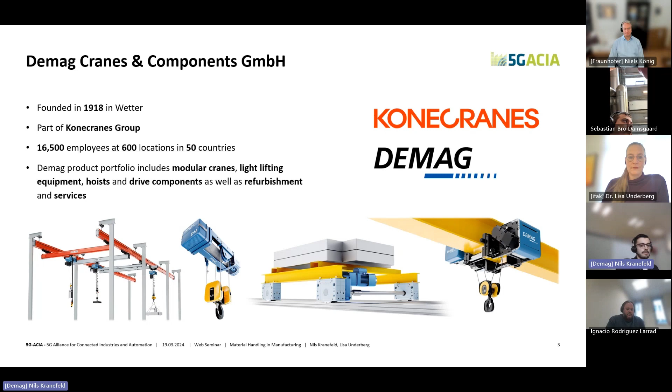I'm working in a research department here, which is called the Research and Business Factory in Germany. We're also located here in Wetter. Currently, we have 9 team members. The department was created in 2018, and we're focusing on the participation in government-funded and non-funded research projects, as well as in business-driven projects. There, we're developing the next generation of cranes and also building different demonstrators and proof of concepts, as well as minimum viable products for our research. And we're also participating in associations and alliances, as here in the 5G-ACIA. Another big part of our work is working with students who are writing their bachelor and master theses at our department. So we're also training new specialists.

Talking about the facilities, here you can have a short view of our research factory. We also have some office space, you can see on the right side of the factory, and there are several material handling equipment cranes, for example, installed. And we also have a 5G standalone network from Nokia, which is currently on release 15.

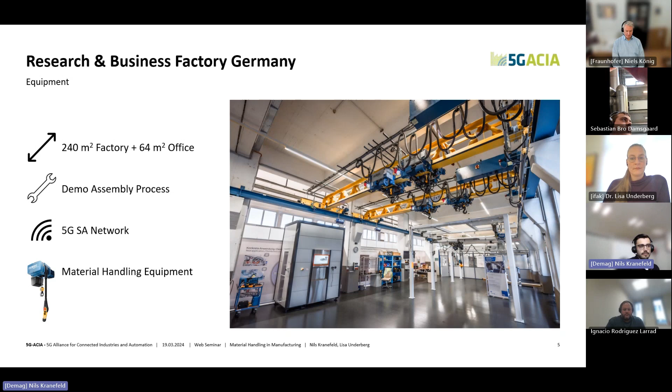In 2021 we started this testbed here at the research factory, and there we want to test the 5G technology in an industrial environment with special regards to our material handling applications and in terms of intralogistics. So here we're evaluating the performance of the 5G network by measuring - that's the first part. And we also demonstrate the use cases we want to use with the 5G network. We do all of this together with our 4 members, so also we're working with Nokia, with Rohde & Schwarz, and ifak.

Our use case we want to evaluate is that we implemented innovative assist functions in our cranes, which are semi-automatic. We will later see a demonstration of them. Therefore we're using different devices like you see on the left image in the building here, and we have an AGV, also a high lift truck, and we're also using the overhead cranes that you can see in the image. These devices and machines are communicating with each other, and they also transfer control commands and safety functions.

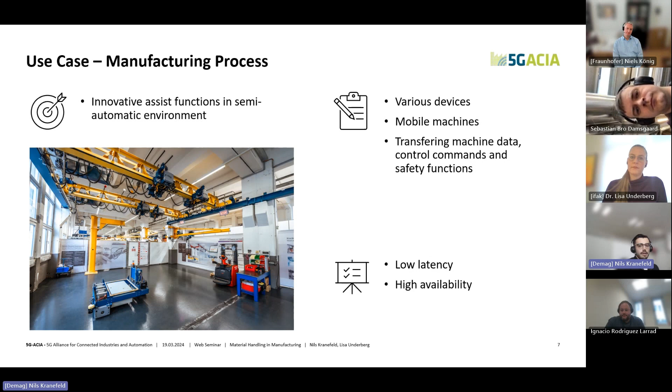The concrete benefit of these assist functions is that the worker is supported in many ways. First of all, it is possible to control the cranes via repetitive routines, and therefore we are reducing non-value adding activities like walking to get the radio control. We also enhance safety, as it is easier for the operator to control the crane while having more option to see the environment.

And now I will show you a quick video where we demonstrate the functions, and please follow along.

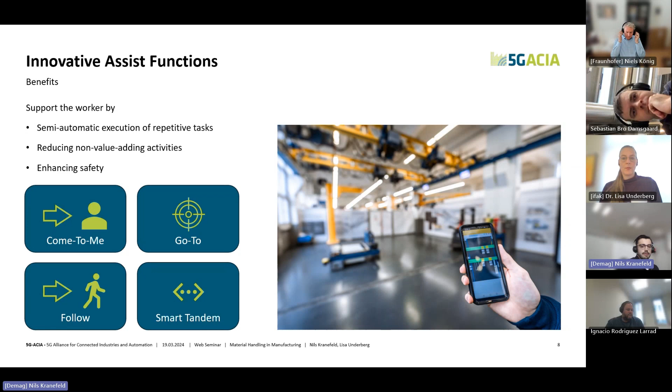Hello and welcome to our research and business factory here in Wetter. Today we want to show you our 5G-ACIA testbed, and we want to demonstrate the use cases and the innovative assist functions that we implemented in our cranes.

The assist functions are controlled via a smartphone app. After opening the app, the operator first needs to authenticate himself by scanning a QR code. When the authentication process is finished, a shop floor screen appears. On this screen, the crane, the AGV, and the operator's position are displayed.

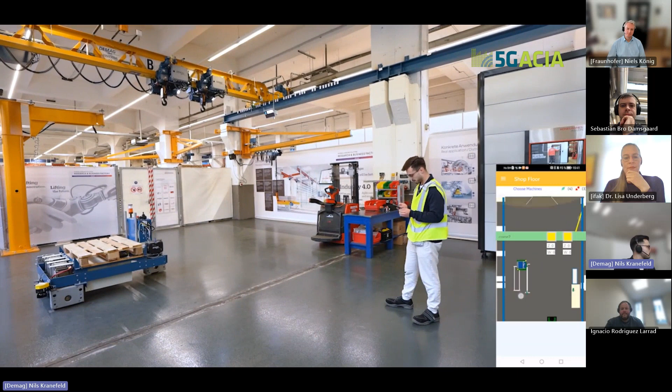To identify the positions, ultra-wide band tags are placed in the vest and on the machines. Before this function can be used, the crane needs to be reserved. To reserve the crane, the operator taps on the desired crane and reserves it via a dedicated path.

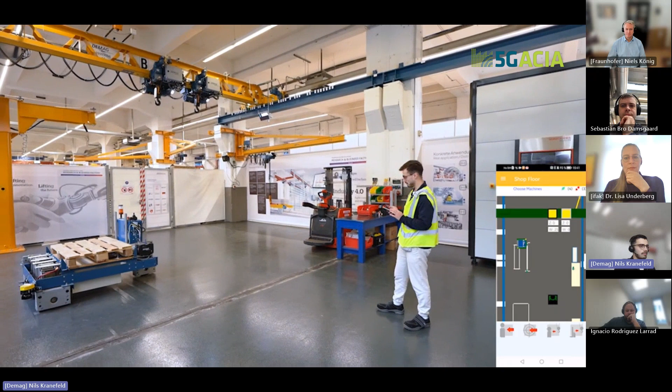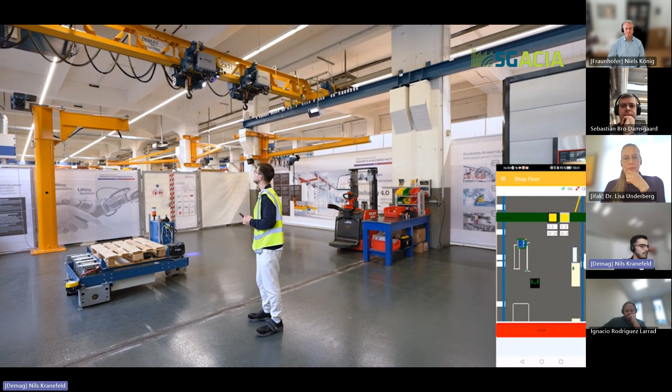When the operator selects the trolley, four buttons appear at the bottom of the screen, used to trigger the different assist functions. By triggering the Come To Me function, the operator tells the crane to move to his position. The blue spotlight indicates that an assist function is in operation, and the crane automatically moves towards the operator without any need of a radio control.

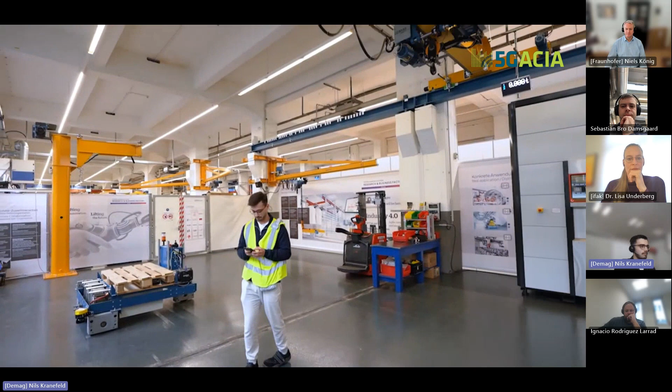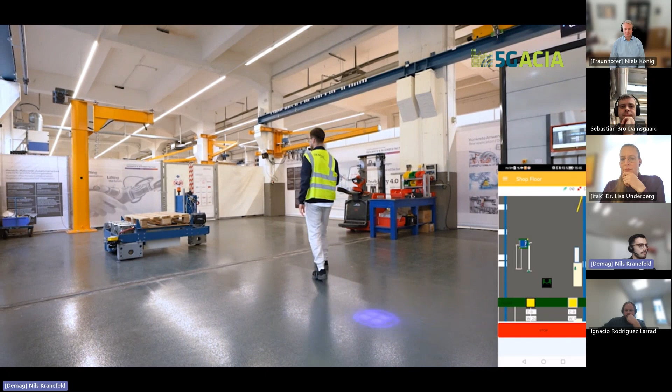Another assist function is the follow function. When active, the selected trolley follows the path of the operator. A slight delay is implemented to prevent sudden movements of the crane and enhance safety. During this process, functional data is periodically exchanged using OPC over our 5G network.

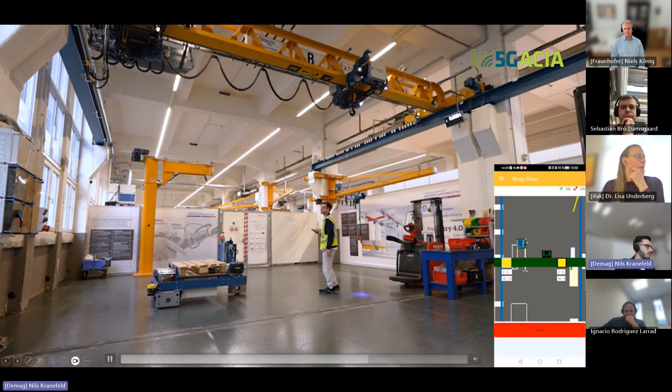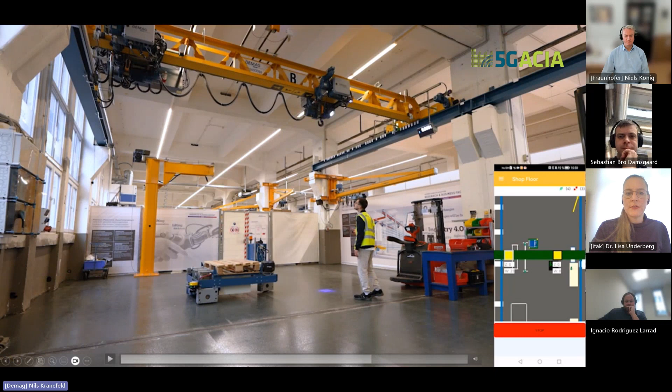A simple function is the follow machine function. When used, the crane follows a machine traveling through the factory. In the show scenario, the crane follows an AGV. The AGV uses a SLAM algorithm for orientation on the shop floor. The positional data is extracted and transferred to the crane via the 5G network.

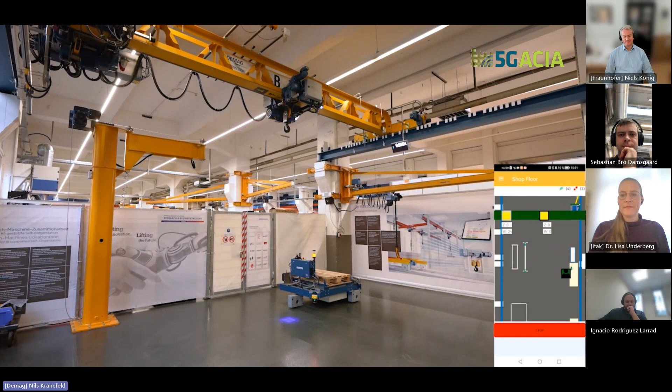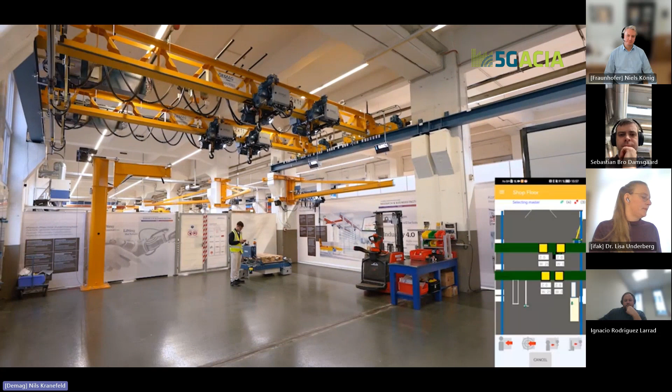It is also possible to use multiple cranes and trolleys together at the same time. When activating this operational mode, the operator selects the master trolley, which specifies the position used during the process.

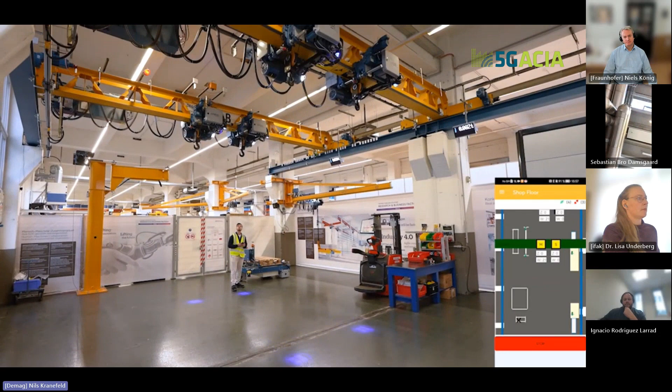If the so-called tandem mode is active, the safety-related CAN data, which needs to be exchanged between the cranes, is also transferred via the 5G network. In this use case, ultra-reliable low latency is needed to ensure functionality and safety.

Okay, yeah. First of all, sorry for the issues with lagging. I hope at the end you still got the idea of our use case. We will also provide the video so you can watch it again afterwards. I'm very sorry for that. I think I had some GPU issues, whatever, having the video on and also my camera.

But basically, I think you got the idea that we have data, safety relevant data, and also communication data that is transferred for the control of our cranes. Now I'm happy to hand over to Lisa, and she will explain how we evaluate the performance of our 5G network regarding our shown use case here.

Thank you very much, Niels. You made a very good summary. Niels presented basically the first part of the testbed, which was to demonstrate the use cases relevant to control the cranes and to have the smart assist functions. The second part was on measuring, and that's where ifak and Rohde & Schwarz come into play, the two partners. I'd like to take you on a quick trip to some example results.

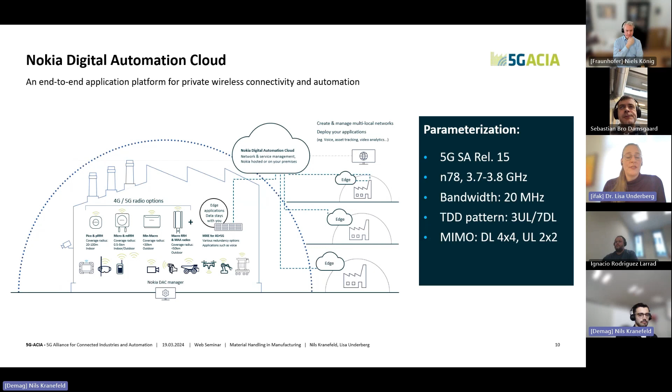First, we conducted not only one standalone measurement campaign, but multiple measurement campaigns. We started out with an LTE implementation that was installed in the research factory and then moved to 5G SA. For today's presentation, we selected 5G SA results, not only of default parameters, but also with adapted parameters, as the default parameters are targeted to balance energy consumption and performance. As you have seen from the use cases, we have specific requirements with respect to reliability and low latency.

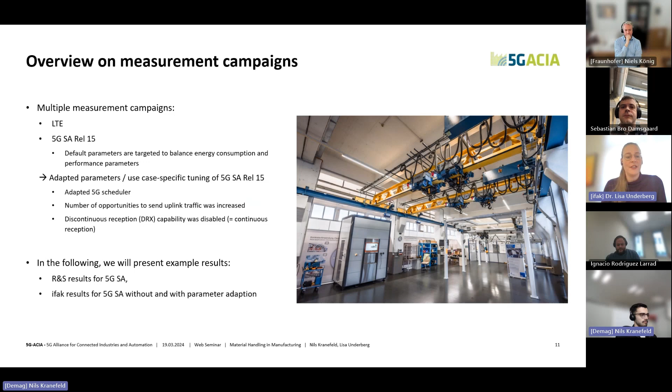So we adapted several aspects in the 5G network with the help of Nokia, and then redid measurements. We will see some results for the adapted 5G SA network from Rohde & Schwarz, and then some results comparing the parameter adaptation, the impact of the parameter adaptation, from ifak. Next up will be a quick overview of the measurements conducted by Rohde & Schwarz in our testbed. There were basically two measurement types, one passive and one active.

The passive measurements were conducted using a network scanner and software for evaluating connected devices, and the active measurements were conducted using connected devices, which you can also see in the figure below, where you see what was measured in the active measurements: basically a round trip time from the measurement device via the base station to the core, to an application connected to the core, and back to the device.

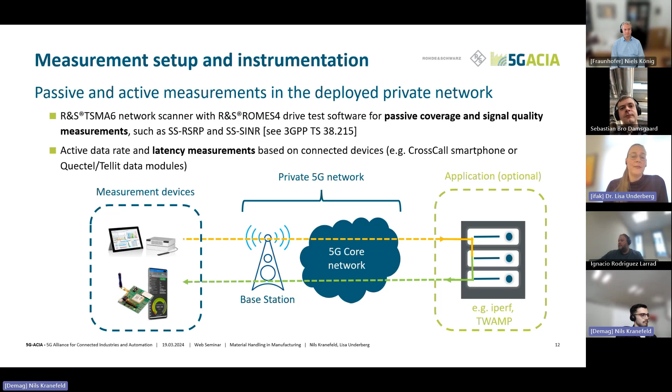First, the passive coverage to get an overall impression on what the coverage was in the research factory. Basically, we can summarize that the results were very good compared to public networks within the area of interest. On the right-hand side, you can see two figures that show a top view of the research factory.

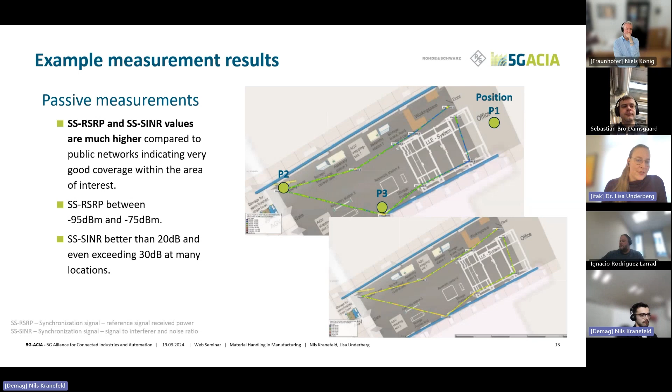In the upper figure, there are 3 positions marked. At these 3 positions, in addition to the walk test, stationary tests were performed for position 1, 2, and 3. On the slide after that, I'm not going into details on the numbers. Please feel free to ask questions in the chat or in the Q&A box if you have any.

For position 3, we selected it to show example results, as the performance of the round trip time was nearly identical at all 3 shown positions. So position 3 is to be seen on the right hand side, where you can see for 5 different traffic patterns: low, medium, high, long, and I40.

The packet loss rate, which was during the measurements 0, so no packets were lost, and that's also something that Rohde and Schwarz experienced in other measurement campaigns as well in non-public networks. The round trip time median increases with increased data rate, which is probably not surprising, and also the packet delay variation increased along with the data traffic.

Below, on the bottom of the page, you can see a very brief snapshot of about 1.5 seconds for the traffic pattern high, where you can see the variations in the round trip time. So the red line marks the median or the mean, I'm not sure by now, which is around 21.3 milliseconds round trip.

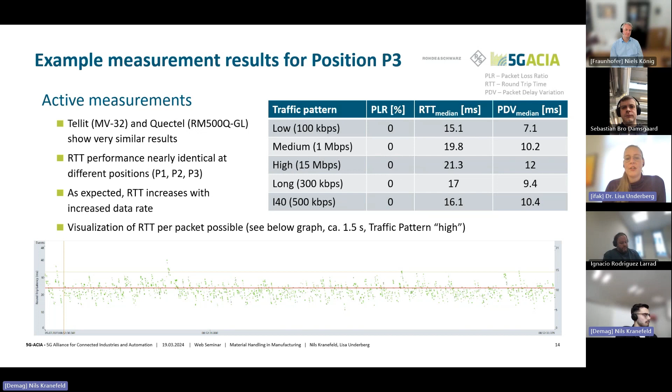And you can see that there are some variations. Sometimes the packets are a bit faster and sometimes it takes a bit longer. And that's something that we could reproduce in the measurements that were performed by ifak.

We used other measurement equipment, basically something that was developed at ifak. And if you're interested in learning more about the tool, I'd like to direct you to our webpage.

But in short, we connected our multifaces, as we call them, as the measurement devices have multiple interfaces, to the network, similar to what Rohde and Schwarz did, but we have on one side the industrial router that the multiface connects to, and then we have some software, which we call FTT Manager, that is in charge of configuration control and result storage, and also result visualization.

And what we are able to do here is not only measure a round trip time, but measure, for example, only downlink, so from top to bottom, or only uplink from bottom to top. And a third example that we'd like to show in the end is also from one UE to a second UE. So UE1 to core and core to second UE.

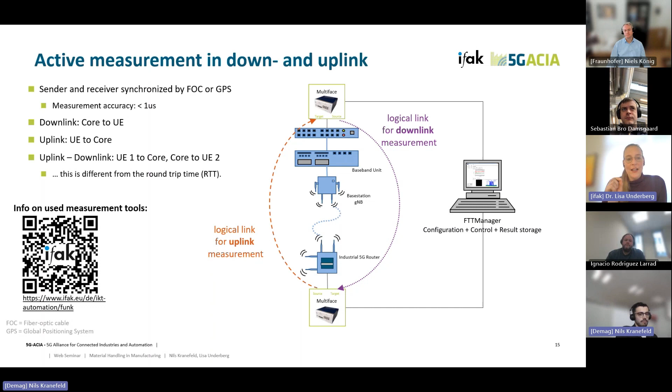I'd like to highlight once again, we're looking now only at the uplink, as opposed to up and downlink measured by Rohde and Schwarz. And we will now compare the results of the default parameters, the 5G network with the default parameters, with 5G with adapted parameters.

But first, let's take a look at the default parameter transmission time. It took mostly always less than 20 milliseconds to go from the UE to the core network side.

You see a histogram on the right-hand side, some outliers. Please be aware the scale of the y-axis is logarithmic, which means the majority of packets were faster than 13.9 milliseconds. To be precise, 95% of the messages were faster than 13.9 milliseconds. This is how to interpret the diagram.

So now when we go back to see the requirements in the use cases, we see that maybe in the uplink 20 milliseconds or sometimes more than 20 milliseconds is too long, which is going back to the 5G parameterization with Nokia.

We adapted some of the parameters towards more performance, especially in the uplink. With the adapted parameters, the P95 interval is now down to 8.4 milliseconds, with no outliers larger than even 13 milliseconds. So from the use cases perspective, that was a huge improvement by only tuning a couple of parameters.

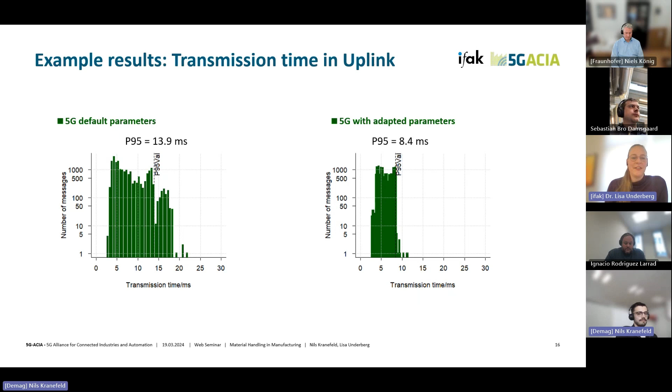The challenge, of course, is to know which parameters to adapt. With the help of Nokia, we were able to interact and improve the uplink timing behavior.

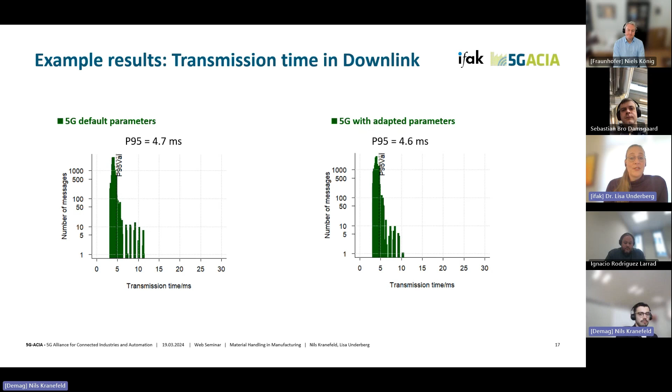Here the transmission times were much longer. Let's take a step back to look at the axes: the x-axis is the message number, which corresponds basically to time, and the measured transmission time is on the y-axis. You can see there are some outliers within the 10-hour interval.

The parameter adaptation did not help remove these outliers, and this is a perfect example of how the testbed helps the deployer and the end user, and also shows the necessity of testing - because now we are investigating where these outliers come from, to further enhance the suitability of the network for our use cases in the Demag research factory.

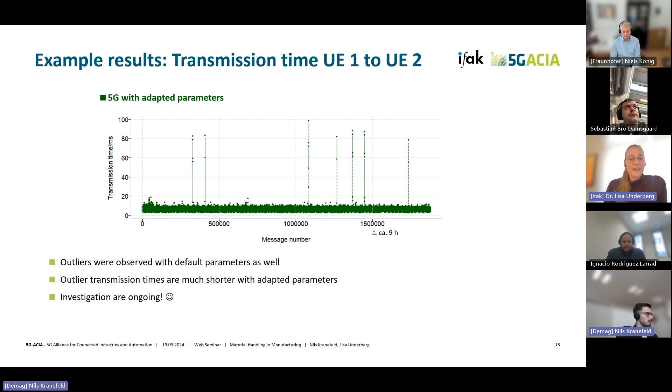Which is a good handover to our conclusion: we conclude that there are three important parts that need to interwork together - testing, deployer, and end user. In testing, we learned that understanding the root cause of a performance issue like these outliers requires more than looking at the physical layer.

On the physical layer, as we've seen from the Rohde & Schwarz results, everything was basically fine. But from the application layer's perspective, we measured these outliers.

We also learned that these outliers were different for different devices, which is why we recommend testing configurations that match the target application as precisely as possible - meaning using the same devices you're going to use in your system. Of course, that doesn't always work, because measurement systems differ from what the end user will use.

So we have to keep interacting from the testing side with the deployer side, and still learn more about how to adapt the network.

For the deployer, we learned it was helpful to build up expertise in the vertical we're looking at, to see the site, to see how the 5G network will be used in production, and finally to enhance understanding of the radio frequency propagation conditions in the plant where the 5G network is deployed, through interaction with testing.

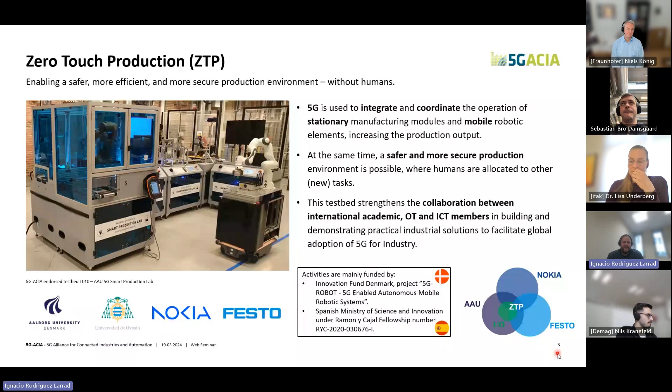We have the different expertise of the different partners in different areas. We have the OT, that is Festo, with production lines, PLCs, and all kinds of robotic equipment. We have Nokia providing the network connectivity. And the ones acting as OT-IT integrators are actually the universities. We have developed the know-how to do this in a structured manner, and we've been able to speak to both ends, finding a common language and understanding of both OT and IT, so that we are able to build something like this.

First of all, I would like to launch a question to all of you, to get a sense of how important it is for your companies to collaborate with universities. Is this something important for you or not?

Let's see if the questions are coming. Okay, right now we have around 20 replies, and we can see that 65% believe it's important, 22% very important, and interestingly 4% don't really know, but at least nobody's saying it's not important. So it's good that you're giving some value to universities. Thank you very much for that reply.

We will continue, and I will introduce the environment where we are building this. It's a university testbed, but we are building it in a small factory. The small factory where we are building the zero-touch production testbed is actually an industrial research lab where we have two halls: one dedicated to industrial automation, with small robots, robotic arms, autonomous mobile robots, welding chambers, and another with bigger machinery and storage area. So as you can see, it looks like a real factory.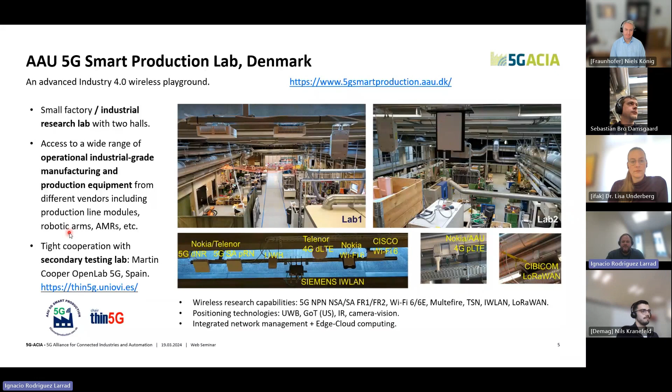So a little bit about the network, the 5G network in the lab. Sebastian later will probably provide you with more details. But we have a 5G private network, so with a core that is on site.

We support frequency range 1 and frequency range 2. This is one of the keys of our testbed, because depending on the quality of service that we want to achieve with the different use cases or applications, we choose one or the other band.

I think it's interesting that we are also supporting multiple cores. So apart from the private standalone core that we have in the lab, we have non-standalone dedicated connections towards a public operator. Why are we doing that? Because we believe that for industrial partners, it might also be an opportunity to run some of the use cases over a public network with some conditions and help from the operators, of course.

What are the key testbed elements or the technology highlights of our testbed? As I mentioned, we want to build a fully automated and integrated setup of robotics, and the main scope for this is, of course, factory automation and intralogistics.

The key elements that we are going to see here is a stationary production line that was provided by Festo. So here we have PLCs, we have a manufacturing execution system, everything as you would have it in a real factory. Of course, by default, the network managing this production line is made of cables and switches, so it's an Ethernet network.

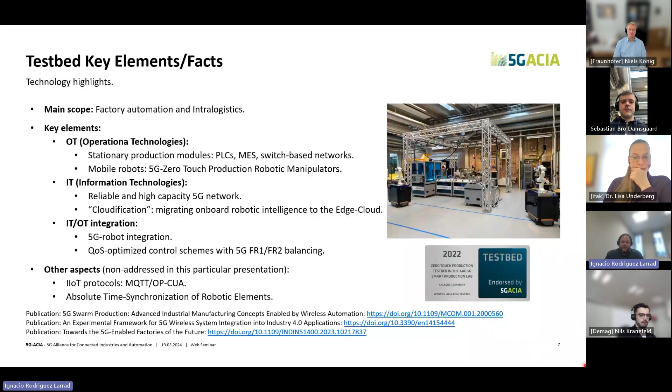There are other multiple aspects that we are researching that are part of this testbed, but I will not discuss them here. We are also dealing with IoT, industrial IoT protocols like MQTT or OPC UA. Once we have our scenario fully cloudified and operating over 5G, we can play with some of the main protocols used in industry, just to understand the impact they have on top of the regular communication. Recently we have launched a research line about absolute time synchronization of robotic elements, using 5G to provide absolute time to robotics so that they can schedule different operations and coordinate themselves.

At this point, I want to launch a second question to you: whether you are familiar with the concept of autonomous mobile robotic manipulators. By this, I refer to an AMR platform that is equipped with a robotic manipulator on top.

Okay, more or less half and half. Most of you didn't actually, so I think that's an interesting finding. Now 50-50. I think we can close the poll.

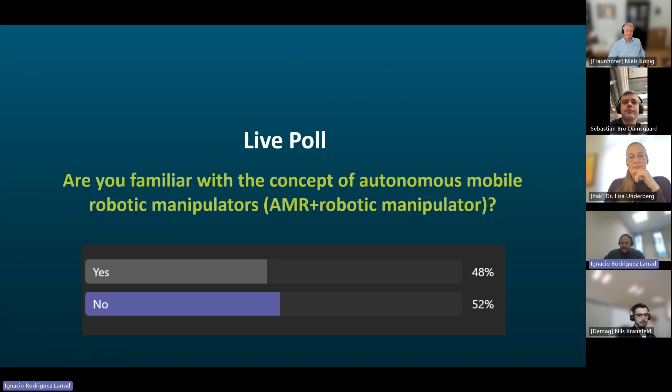Yes, so 50-50. And I'm going to introduce formally a little bit this robotic manipulator.

So normally in industry, we have either AMRs or AGVs or some kind of mobile robots that are moving throughout the factory to bring products from one place to the other. But we also have robotic manipulators that typically are in static positions, in work cells or production lines, but they are not moving. So what we are aiming to achieve is to create a robotic element that can actually provide a higher degree of freedom in our production.

So now what we are doing is to make a mobile robotic manipulator. We have an AMR platform that is equipped with a robotic manipulator. If we take a look at the trends in Industry 4.0 of moving towards a more flexible and reconfigurable production, where we take out the linear production and go more for a decentralized kind of swarm production with different cells distributed across the floor, we will need to transport products from one part of the production to the other. These elements will be very important.

In order to operate these elements that are moving and need reliable and high capacity communication, of course we need 5G. We have demonstrated already that 5G is better than Wi-Fi, than industrial Wi-Fi, for this kind of mobility situation. I'm providing a couple of references there if someone wants to take a look at this.

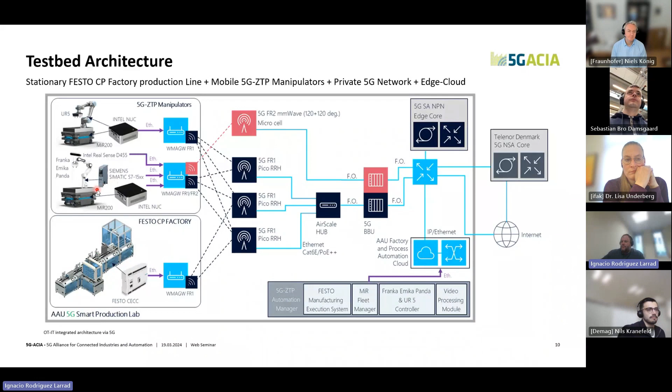We have been doing a number of performance evaluation results, a little bit similar to what Lisa was introducing to us before, but here we have set the focus on the specific robotic control loop actions. So we have some KPIs for the control loop. The most important or the most novel results we have here are for the frequency range 2 for the control loop of the robotic manipulator. That's the top part here.

So when we are sending video from the robot arm to the cloud, it takes around 10 milliseconds because we are sending very large packets of video over frequency range 2. Then the video detection that happens in the cloud, which is some local service that we have here or in a secondary basement, takes around 300 milliseconds, and we have a detection algorithm with an accuracy of 100%. So it's really well trained for the products that are being manufactured in the testbed.

Once we have analyzed the video detection and the robotic arms understand whether we have to pick up a product, we are signaling back over frequency range 2, which takes around 5 milliseconds. Finally, the time that the internal controller of the robot takes towards the manipulator arm is instantaneous.

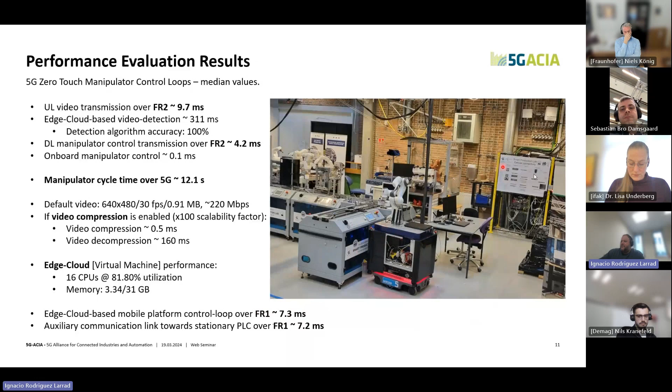I also want to give some highlights on the edge cloud control of the mobile platform and the production line, which has control loops that operate in around 7 milliseconds. This is round trip, so the PLC sends information to the edge cloud, and the edge cloud replies, and it takes around 7 milliseconds.

So I want to summarize this initial introduction by recalling that we have showcased an integrated production environment where we are exploiting the capabilities of a reliable and high-capacity 5G network with FR1 and FR2 support, and edge cloud technology, to build this integrated demo, where the main element is the 5G zero-touch production manipulator, a key element for the future of smart production.

If we take a look and make a couple of calculations with the numbers I've been telling, by introducing 5G, we have a 0.7% degradation in the overall cycle time compared to a use case where we run everything over a cable. But that means having a mobile entity connected with a cable to an edge cloud, which is not a real possibility, or at least not optimal at all.

So, very small degradation. Later I showed that we can apply compression to increase the scalability of the use case by a factor of 100. I want to highlight that only the baseline functionality and coordination has been implemented, and there is full potential to run further optimization and extensions of the work.

Hello, my name is Sebastian. I'm a PhD student here at Aalborg University, and my main focus is the application of 5G and how we can apply it to mobile robots. I'm going to talk a little bit about the network that Ignacio has already introduced.

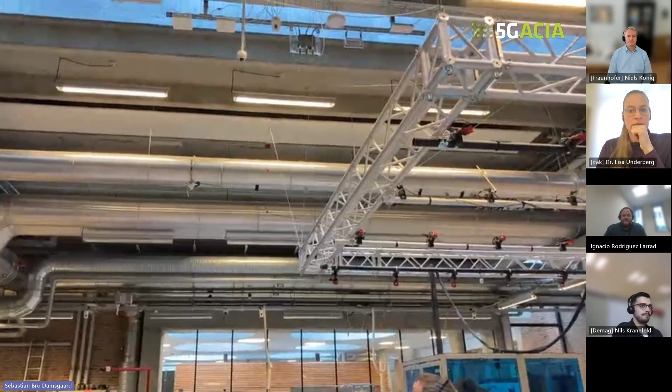First of all, if we take a look up in the ceiling, that's where we have what we call these communication islands, with a lot of different wireless technologies. But let's focus on the FR1 private 5G network that we are operating. We have 3 of these islands that provide coverage for the whole lab. We've configured our 5G FR1 network as a single frequency network in order to optimize for handover performance, so we get completely seamless coverage even when a mobile robot is moving throughout our lab and handing over between the different access points.

Our 5G network operates in 100 megahertz bandwidth, at a frequency of 3.7 gigahertz. We are, of course, operating towards a completely private in-house core that we operate ourselves, but we also purchase services from NDAC.

Additionally, for high capacity communication, we have the millimeter wave setup. It's basically focused around this manufacturing environment, which is where we typically need the high throughput. This is operating in millimeter wave, 26 gigahertz spectrum.

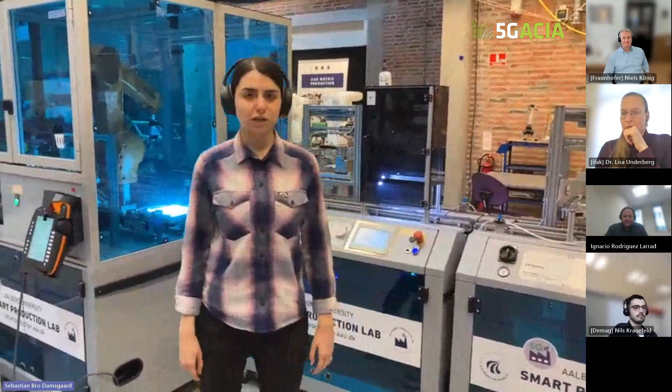Hello, everyone. I'm Fatima. I work as a student helper here at Aalborg University, working on this project. So today we are showcasing a fully integrated production environment where we have stationary elements and mobile elements, and we coordinated them using 5G technology.

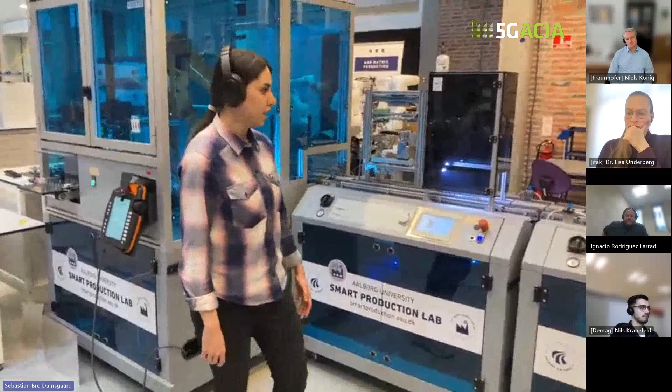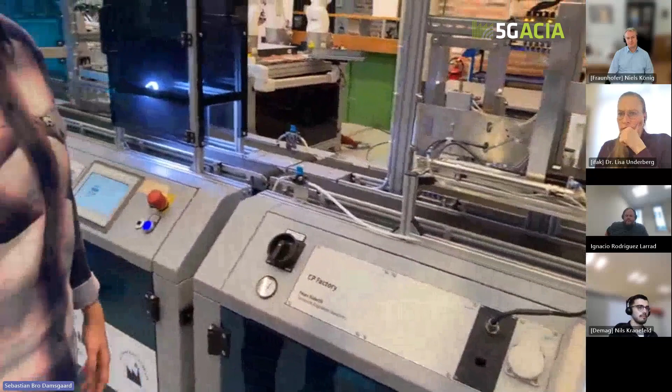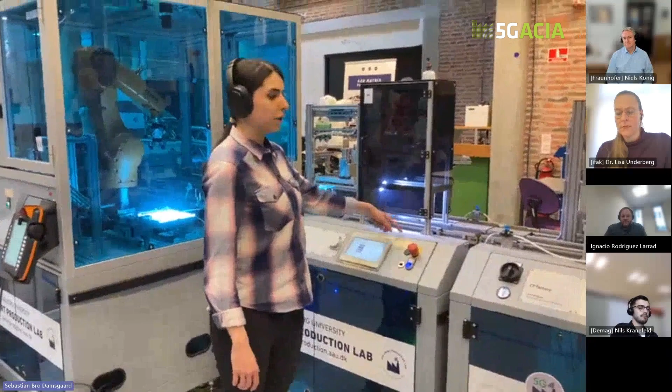So the first element of this testbed is the production line, called CP Factory production line. Here we can see different modules of the production line, and it has different elements: conveyor and stopper button that is used for releasing the pallets. And here we have different products.

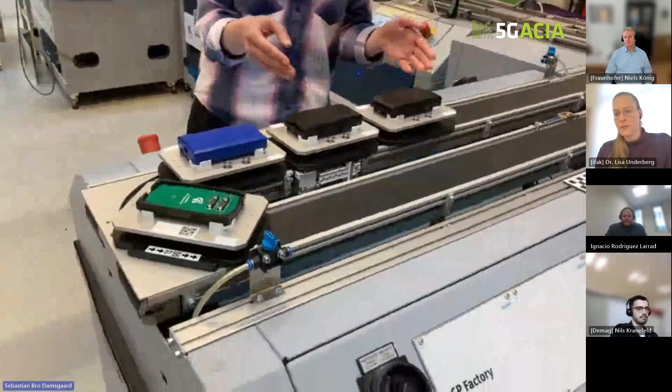Some of the products can be target phones, like in our case, black phones, and some of the phones are unfinalized, and some are not target phones. For example, in this case, the blue phone. These are on a pallet and waiting to be processed.

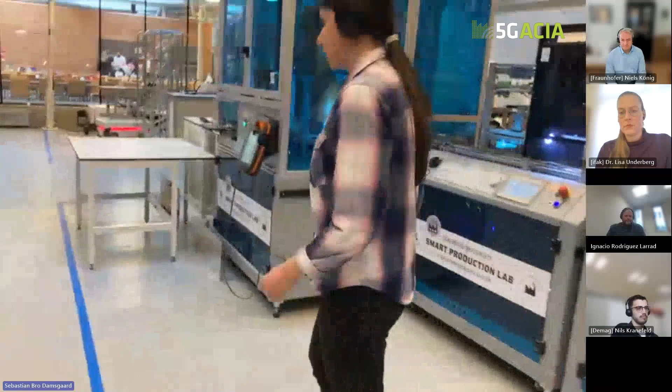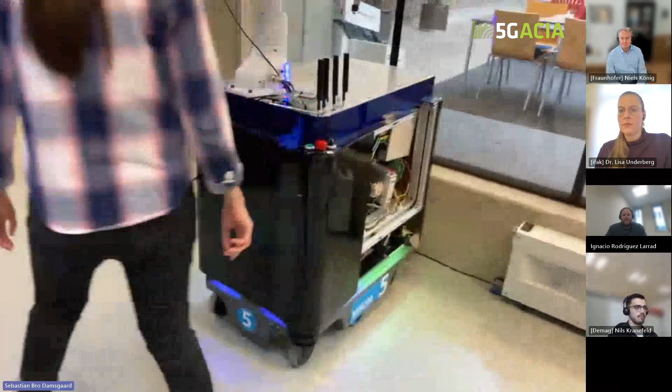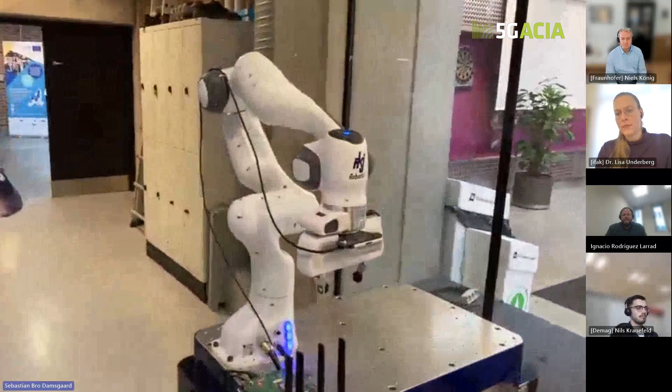The other important element of our testbed is called the 5G Zero Touch Production Mobile Manipulator. Here we can see it has different elements: the MiR platform, which is the mobile robot, the Franka Emika Panda manipulator, a camera - the Intel RealSense camera mounted on the Franka - and also the 5G modem here in the robot used for communication.

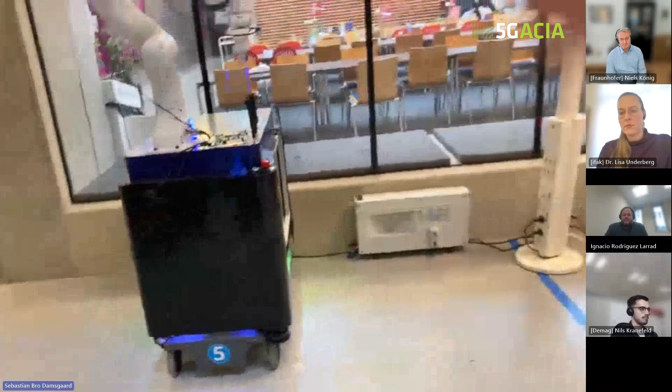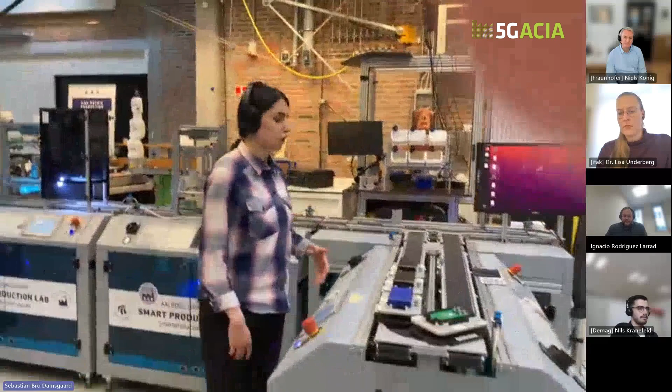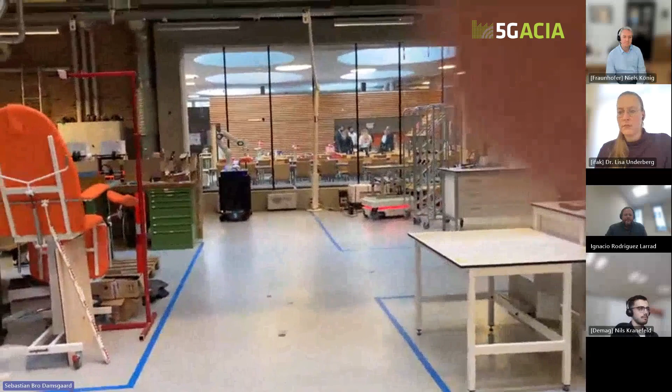Now we will go back to the production module. These products here need to be processed, and the production line will call the zero-touch production module, the mobile robot. Now, as you can see, the mobile robot starts moving toward the production module, and we wait.

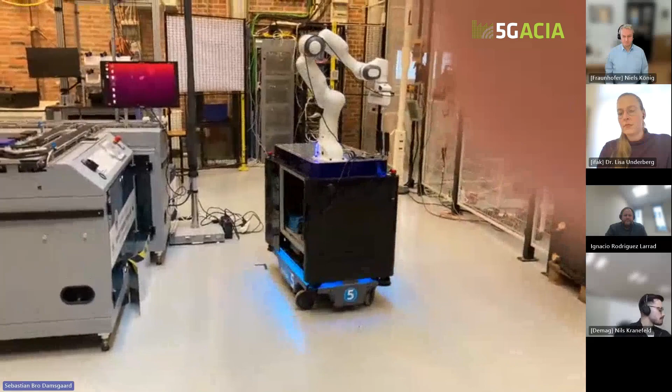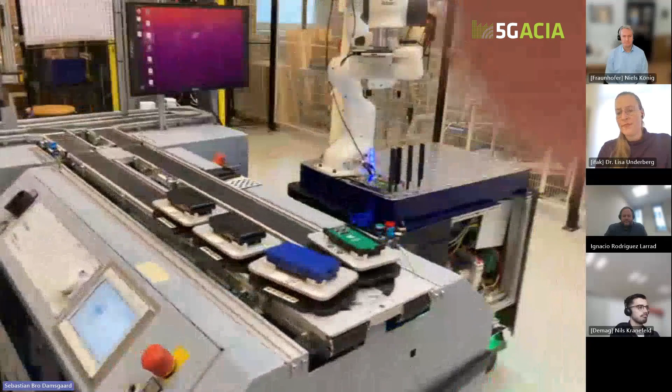And all of the operations, as the other colleagues mentioned, is done over 5G and accordingly. Now the mobile robot is trying to dock near the production line. And now it will go to a checking position to check out the different products here on the conveyor belt.

As I mentioned, these products are rejected because they are not a target phone, and the other one was unfinalized. But these are picked up by the robotic arm to do this execution.

So the black finalized phones are the products. And here we can see also the visualization of this section. So the detection is also done in the edge cloud.

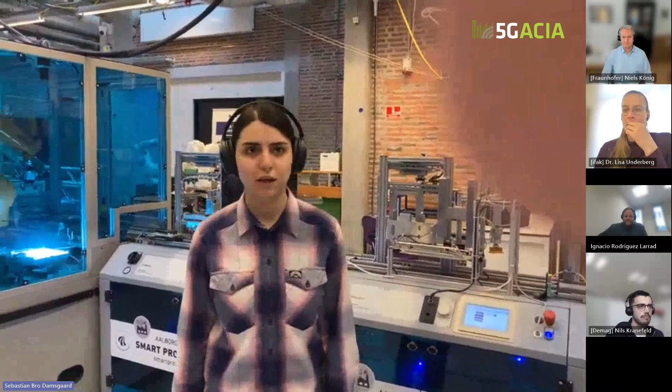And now the robot will move away because it's done with the processing, and it will take the product to another part of the factory. And now the demo is finished. We have shown the possibility of using 5G for integrated automation, and the research is in progress. So I will hand it over to Ignacio to wrap up. Thank you.

Thank you, Fatima, and I think we have to Niels. Okay, so thank you, Ignacio, Fatima, and Sebastian for the presentation and the demos. I wish we would have some additional time, but time is scarce. There were a couple of questions in the chat, and I've seen that Lisa has already answered some of them. So nevertheless, I think we have one or two questions that we can still answer, hopefully.

So there was one question from Hervé Bonville from Mitsubishi Electric: what QoS parameters are used? So, guaranteed bitrate, non-guaranteed bitrate, QoS class, and what kind of adaptation was made to the base station scheduler?

Are you able to answer this question, Lisa?